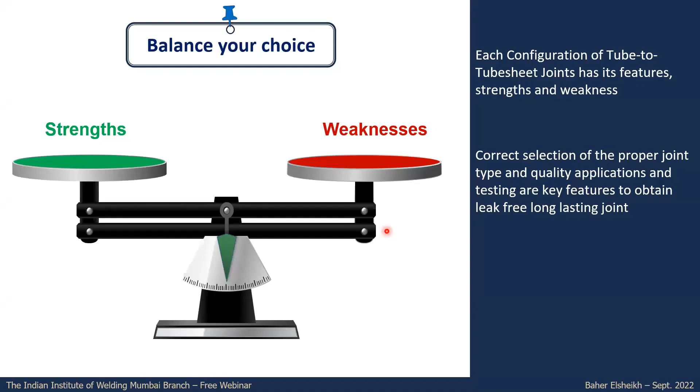Now for the different types of tube-to-tube sheet joints, there is no one selection that suits all applications, either from the application perspective to have the proper design or characteristic of the joint, or even from the cost perspective. That's why you need to think about the proper joint for each case. Each type of joint has its own strength and weakness, so you need to balance the features and select or apply the proper one for your application.

Now for the expanded only joint, it is the most economical one. There is no welding associated with this, and it is easier to retube in the future. So if you are looking at future maintenance or repair, it is much easier to remove the expansion and remove the tube and reinsert again, rather than removing a weld and re-welding. For future plugging with the expanded only, you can easily use a taper plug, which is very simple to apply. And there is no tube sheet beveling required, meaning machining of the tube sheet face is not required, so it's also much less work activity.

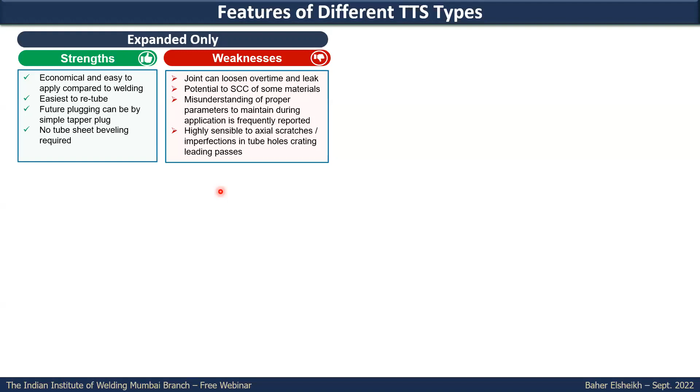But as weaknesses, it can be loosened over time, especially under cyclic load, temperature, or high differential pressure between the two sides. And in some cases, it is potential for stress corrosion cracking if you have that much high residual stress in the application. That's why for some materials, as we'll see later, you have to limit the extent to which it will be expanded. It's not something strange that there's frequent reporting that the proper parameters need to be maintained during application of the expansion, which is somehow misunderstood, leading in some cases to frequent leaking or issues in the heat exchanger. So it looks simple, but it has its own experience and technical requirements, and it's highly sensitive to axial scratches, because once you expand the tube with the tube sheet, it will take the shape of the tube sheet hole, including imperfections and scratches.

Expanded and seal welded is much better compared to expanded only. You will have more leak resistance and better sealing. So it is somehow much preferred compared to expansion whenever you have a slightly higher critical service, where there is no tolerance accepted to have a mix between the two sides.

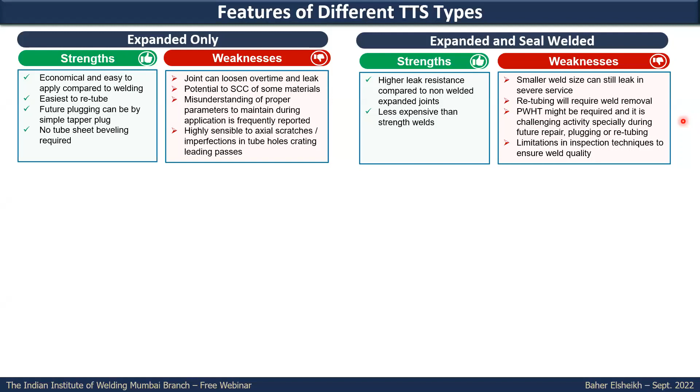The weaknesses for this one: the small weld size is still somehow vulnerable to leaking in case there is some issue in the joint. Retubing in the future will require weld removal, so more work is required. And in case post-weld heat treatment is required, especially for certain services, this will be of some interest during initial construction, and the main concern will be during plugging or retubing. To do post-weld heat treatment at site is not an easy application to have uniform application of. And also there's a limitation of the inspection technique for the weld, which is a common limitation for all weld joints.

Strength welded but not expanded - you can apply only strength welding without expansion. The weld size is calculated to be strong enough, as we will see in the requirement of ASME, and there is no expansion groove needed for this type of joint. So somehow less machining and less work is required, and there's no expansion step needed, so this step is eliminated. But it is potential for crevice corrosion, because the backside of the weld will have a gap where fluid from the shell side can accumulate and cause crevice corrosion. And also there's the limitation on inspection technique, which applies to all welding joint types.

Retubing in the future will be something required - removing the weld, conditioning again the bevel of the tube sheet, and re-welding again. And if post-weld heat treatment is required, it's also not an easy application, especially during repair in future or retubing. Future plugging cannot be only a taper plug.

You have to either install mechanical plugs or welded plugs. Under cyclic load, in case you don't have the expansion, this strength weld will be subjected to fatigue cracking, and it might crack.

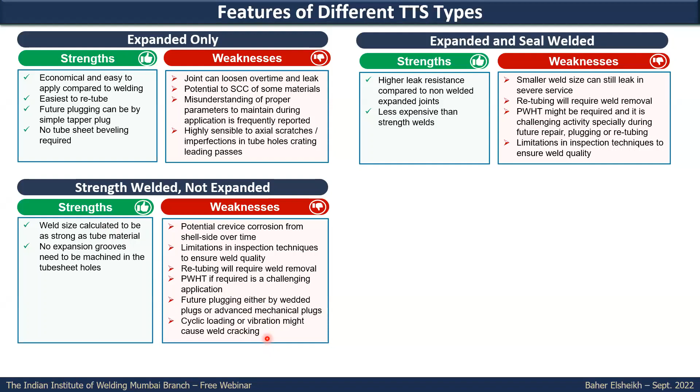The last configuration may be strength weld plus expanded, and this is the most leak resistant one. You will have the strength weld, and also the expansion, which will close the gap. You will eliminate to a very good extent the susceptibility to crevice corrosion, and the weakness part is it's a little bit more intensive work, so from a cost-wise perspective it is higher cost, and there is limitation on inspection, as we said earlier.

Again, all the requirements for the welding here, for future plugging, post-heat treatment if required, where you need to remove the weld or apply weld again, or the application of post-heat treatment at site, which is a very challenging exercise. In high temperature service, usually, or aggressive fluids, usually you cannot rely only on expansion. You need to have welding, whether you apply strength weld plus seal plus light expansion, or expanded plus seal weld.

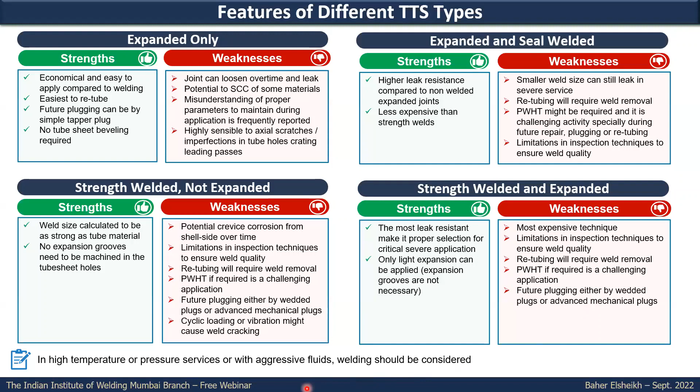Now for the requirement of the tube-to-tube sheet joint, the percent of expansion recommended depends on the material being used. Some materials are subjected to work hardening, or some other material might develop residual stresses in future, which might cause stress corrosion cracking in service. That's why the percent of application of the wall reduction, how much it will be expanded, depends on the material.

We will see that ductile material like carbon steel or low alloy steel can have up to 8% applied. Between the two common standards in the industry, TEMA, Tubular Exchanger Manufacturer Association, or API 660, the standard for shell and tube heat exchangers, there is some minor variation in the recommendation, but almost the same approach or trend in the recommended percent of expansion.

What we can see here is that for duplex stainless steel and for austenitic stainless steel, you have a little bit less recommended target wall reduction or expansion, while for copper alloys and also for carbon steel or low alloy steel, you can apply a higher degree of expansion without any issue.

For the duplex stainless steel, we can see in API 938C, for the use of duplex stainless steel, they are recommending light expansion up to 2% only, plus strength weld, meaning you cannot apply only the expansion.

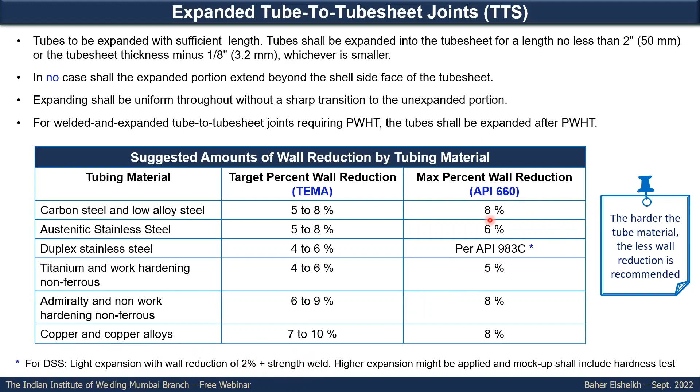Now, one factor that also contributes to how the tube will be affected under expansion is how much gap or clearance there is between the outside diameter of the tube and the tube hole. In TEMA, there is standard fit clearance or special fit clearance, and it is highly recommended to have the special close fit clearance, where there is a minor or small gap between the tube and tube sheet hole, so that you don't have more plastic deformation in the tube while applying the expansion.

Against this, the standard fit with higher clearance is in many cases preferred by the manufacturer because it facilitates the insertion of the tubes during fabrication. But as far as you don't have limitations on the material, you can apply standard fit. The best recommended practice, though, is to apply the special close fit. Especially for austenitic stainless steel, duplex stainless steel, and titanium tubes, you need to apply the special close fit clearance.

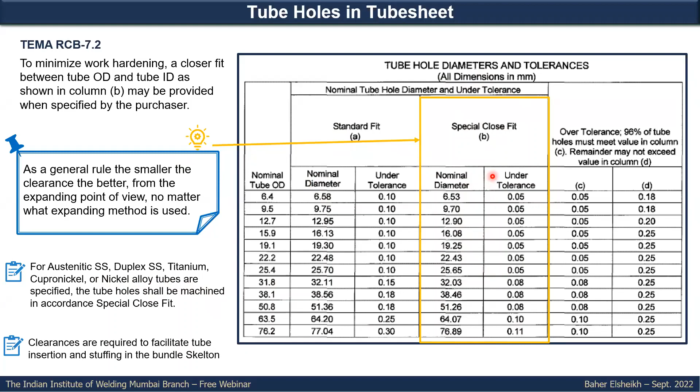For the preparation of the tube sheet hole, it shall be clean, and there is no specific requirement for it to be polished or well machined, because you need a force to grab the tube into the tube sheet hole. But it's very important to avoid any scratches or imperfections in the tubes. As a general rule it should not be there, but we also need to understand that longitudinal imperfection is considered of higher risk compared to radial imperfection.

If this is the shell side and the other one is the tube side, a longitudinal imperfection means you will have a leak path between the two sides. A radial imperfection is still not a leak path, so you can have some tolerance there. But generally, you should not have any imperfections or scratches in the tube sheet hole.

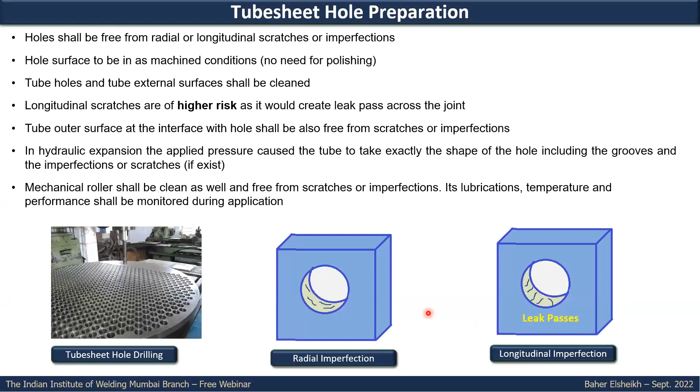When applying the two different techniques normally used in expansion, whether mechanical rolling or hydraulic expansion, as we'll see in the next slide, hydraulic expansion will force the tube to take exactly the shape of the tube sheet hole, including any imperfections or scratches left in the hole. That's why it is very crucial to have it well machined, to avoid such impact on the tubes, which might lead to cracking in future, or to a leak path between the tube side and shell side.

The three different techniques normally used for expansion are roller expansion, hydraulic expansion, and explosive expansion.

Normally, when applying expansion, you should have annular ring grooves. The most common is to have two grooves as per TEMA requirement, but there's an exception: in case of a thin tube sheet with thickness less than 1 inch, you can apply only one groove. For roller expansion versus hydraulic expansion, there's a different recommendation for the width of the groove. In roller expansion it's a fixed value like 3.2 mm, while in hydraulic expansion it's a function of the tube mean radius and the tube thickness.

We will see this exercise in this table. We make a comparison for some different tubes with different thicknesses, showing how much the width of the groove might be required for either mechanical roller or hydraulic expansion.

You will see a major difference for the recommended hydraulic expansion width. By experience of some manufacturers, it is very important to maintain a little bit higher width for the hydraulic expansion to maintain proper sealing. Especially in hydraulic expansion, the tube will take the shape of the groove because you apply pressure. So if the groove width is very small, the tube will be forced to take this shape, and it will have a localized high expansion, which might cause stress concentration at the edge of the groove, and in future it might lead to cracking or stress corrosion cracking on some surfaces.

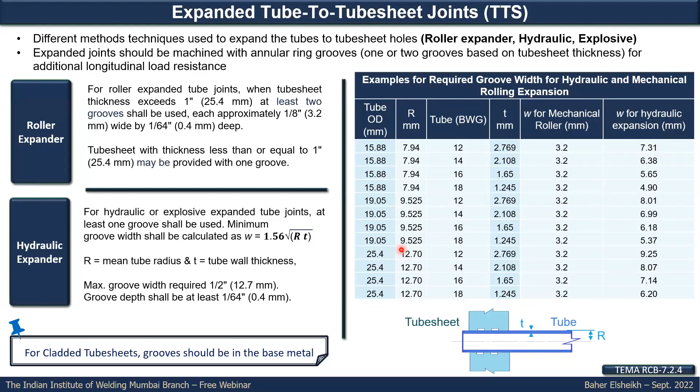This is the application of the mechanical roller. In mechanical rolling, we can see different tools and different types of rollers, with different manufacturers working on that. But you need to understand this field has its own specialty, and in many cases you need to consult the manufacturer of the tool.

There is good recommendation, well known from experiments and experience, for the roller application: how much pressure to apply, whether in one step or stepwise application on the tube sheet, and how many rollers are required, like what we see here for thin tubes, where 3 to 5 rollers should be applied.

You also need to think about the ligaments between the tube holes, which differ between patterns. We have 4 types of tube pattern: triangular, rotated triangular, square, or rotated square. In rotated square and square patterns, you'll find a little more material in the ligament area compared to rotated triangular and triangular, meaning that under the same force, which can cause deformation in the hole itself, the deformation will be more in triangular compared to square or rotated square, assuming the same tube sheet material and thickness.

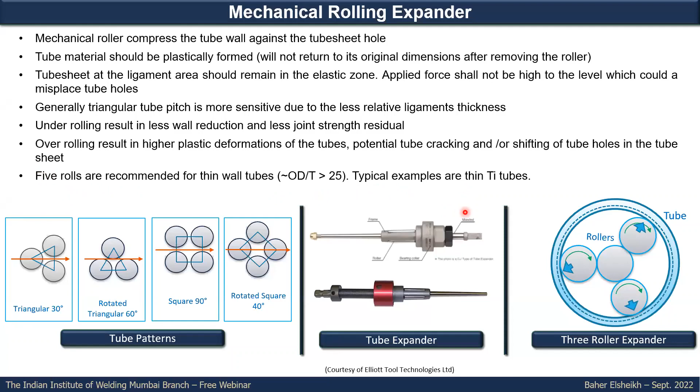This is an example of a roller with three rolls; there are also tools with 2 rolls, and some with 5 rolls, as usually recommended for thin tubes like titanium tubes, where normally thickness is 0.6 up to 0.8 or maximum 0.9 mm. You have to apply 5 rolls in this case, otherwise you will face issues with cracking in the tube.

Hydraulic expansion is applied by applying hydraulic pressure through a tool inserted in the tube sheet hole area, and by applying the pressure you force the tube to seal against the tube sheet hole. This application can be done without a groove in some cases, or with grooves. In hydraulic expansion, the uniform application of pressure will force the tube to take exactly the shape, so if you have a groove, it will take exactly the shape of the groove.

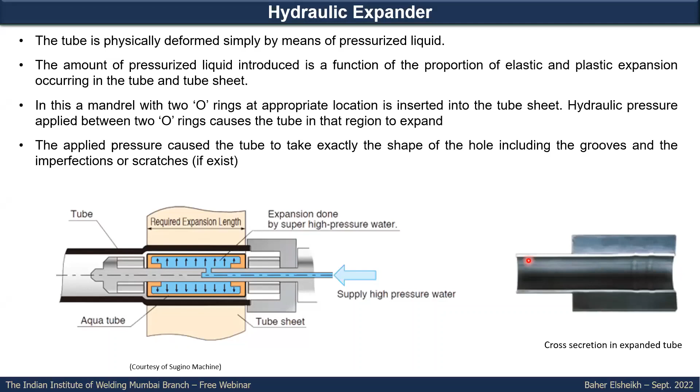This is not usually the case with mechanical rollers, because the mechanical roll will have a little bit longer length, so the groove will come somehow within an area of the roll. The roll has a maximum OD, and it cannot go beyond that. But in hydraulic expansion, it's a pressure that forces the tube to do more plastic deformation in the groove. That's why the width of the groove in hydraulic expansion needs to be well respected, following the recommendations in TEMA and the manufacturer's specs. It has a little bit wider width.

Now we'll move to welding for the tube-to-tube sheet joint. Welding can be either manual or automatic, using orbital welding techniques, usually with gas tungsten arc welding. It is highly recommended to have a minimum of 2 weld passes, and this recommendation is found in many standards, including API 660. So in the selection of the filler wire, you have to respect achieving this during the qualification of the WPS.

One of the challenges while welding the tube-to-tube sheet joint is the relatively high thickness of the tube sheet. This causes a high heat sink and a high reduction in temperature during the weld application. That's why for materials requiring maintained interpass temperature, you might need to apply preheat, and this preheat should be applied uniformly on the tube sheet. Otherwise, you might have issues in the ligaments area in some thin tube sheets.

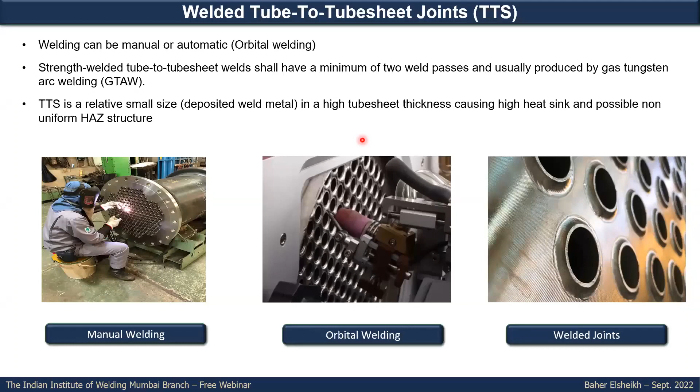This will be a very big challenge if you are working in after-service repair or doing activities on the tube sheet. The control during initial manufacture or fabrication in the workshop can somehow be better monitored. But as we'll see later, you need to think about future work on the heat exchanger during the design.

But other than those recommended in ASME, you are not restricted to only using ASME configurations. There are other configurations, like some with setback, or tube-to-tube sheet welds where it is welded to the back side of the tube to avoid any crevices between the tube and the tube sheet hole.

Another common recommendation, instead of the normal V groove, is to apply a J groove. J groove, or U groove, compared to the normal V groove, gives a better chance of full penetration of the root pass, especially for small joint sizes. There is much limitation in inspecting this weld joint, especially at the root pass. So in some specifications of well-known companies in the industry, they recommend only using the J groove for this reason.

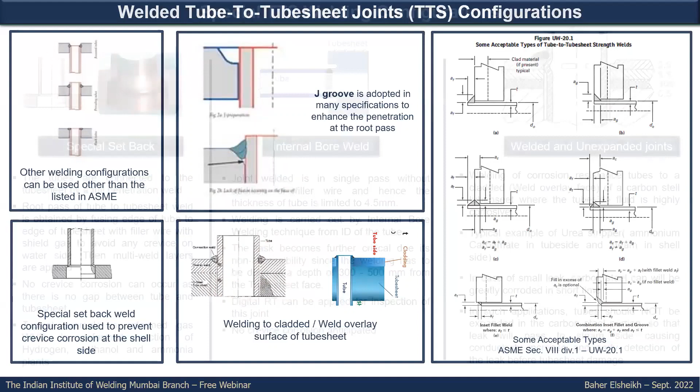In some other applications, you might apply the tube-to-tube sheet joint to a cladded, welded, or weld overlay face of the tube sheet. In some other cases, it is highly advised not to do expansion, only welding, and we will see later why this recommendation is advised. Those are some special TTS welding configurations we can see in the industry.

It's not listed in ASME, but it is used in many applications. This is a special setback weld, normally seen in waste heat boilers in the reforming section of ammonia, methanol, and hydrogen plants, where there is a small lip in the tube sheet from the shell side. The tube also has a lip, like a step, and while welding, it will be fused together. So you totally fuse this part, with no space or clearance for crevice corrosion. This is highly recommended for this service because the temperature here is too high.

And on the shell side, there is boiler feed water. Even with minor contamination of the salts in the boiler feed water, you might have crevice corrosion here, of much higher risk.

This internal bore welding is where the tube is not inserted into the tube sheet, but is butt welded to the back side of the tube sheet. This application is called internal bore weld. This butt weld has many advantages: you will not have the crevice between the tube and tube sheet, and you can also apply proper inspection using digital RT or UT for the weld joints. So you will have very good confidence in the quality of the applied weld.

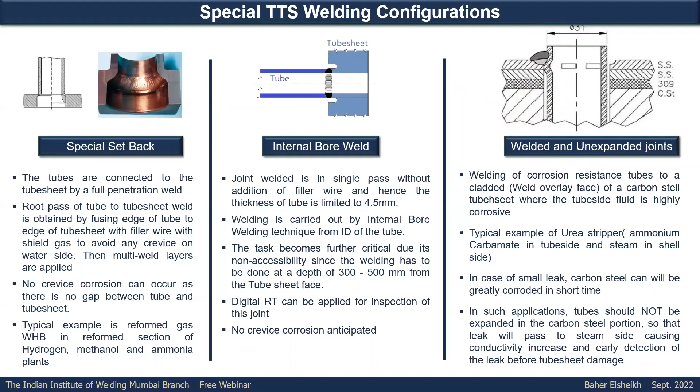Now we will look at how ASME Section 8 Division 1 calculates the required thickness or throat for the different weld joints of the tube to tube sheet. As we said earlier, there are two types of strength weld: full strength weld and partial strength weld, and also, if you can remember, the seal weld.

But for seal weld, there is no calculation required. It is only a supplementary requirement for sealing by the expansion, so no calculation is required. But for the full strength and partial strength weld, there are some equations that need to be applied where you can calculate the minimum dimension of the weld required.

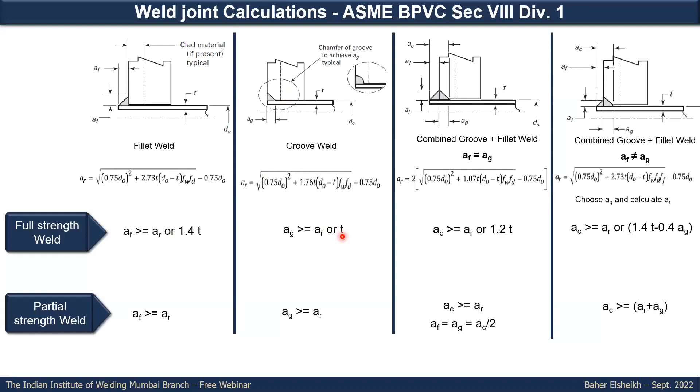If you look here, the recommendation for the full strength weld compared to the partial strength weld is more stringent, as you can see. Here it is whether the greater of AR calculated from the equation or up to 1.4 t, while for the partial strength weld it should only be greater than AR. You will see the same for the different configurations. So as an initial understanding, you will see like the AF, the weld size or weld leg, it should be greater than AR, or 1.4 t, meaning under any condition this AF should not be less than 1.4 times the tube thickness. It might be higher, but it should not be less than this. While in the groove, T is acceptable up to T in case the AR is less than the thickness.

We will have later an example for how to calculate it when we talk about the minimum leak path.

Now for the welded and expanded configuration, there is a very famous question asked many times: when we have both expansion and welding applied, what do we have to do? Expand first then weld, or weld first then expand? There is no single answer that says this is the highly recommended one, but you need to understand the pros and cons of each application so you can select the most proper choice for your case. If you do expansion first then welding, the expansion will close the gap between the tube and the tube sheet hole. So in this case, while applying the weld, you will close the gap where the weld gases should escape.

So you might have higher chance for having weld porosity, especially in the root pass of the weld. Also, the welding after the expansion, the heat from the weld and maybe from the post-weld heat treatment, if required, will do some loosening for the expansion. So whatever expansion you have done earlier will not be the same intact after applying the welding.

Also, one of the features in doing expansion first is that you might do some testing like leak test or hydro test to confirm that your expansion is intact, then you can apply the welding. This is one feature. But if you think of the opposite, welding first then expansion.

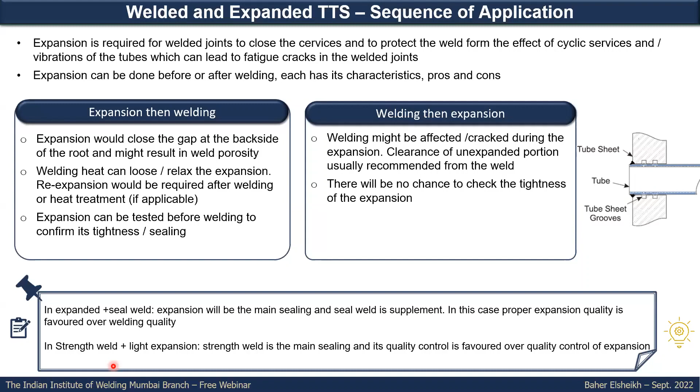For the application of cladding or weld overlay tube sheet, it is required to apply the cladding to the tube sheet in many situations, like having corrosion resistance of the tube sheet face in case you have a corrosive media, instead of having the solid tube sheet from higher material or high corrosion resistance alloy, to reduce the cost or the fabrication requirements. So only weld overlay or cladding surface will be applied here.

In some other cases, also to avoid the dissimilar weld between the tube and the tube sheet. If you have the matching material from the cladding layer or weld overlay layer with the tube, you'll avoid the issue of the dissimilar weld, which can cause some cracking under thermal expansion, or also avoid galvanic corrosion.

In some cases, we are applying the weld overlay so that in future, whenever we need to apply plugging and the plug needs to be welded to the face of the tube sheet, you will not require heat treatment. So if the base metal, for example, is chromium-moly steel, and you applied some grade of austenitic stainless steel or nickel alloy, in future if you need to plug and weld to the tube sheet face, you can do it easily without needing to apply post-weld heat treatment again.

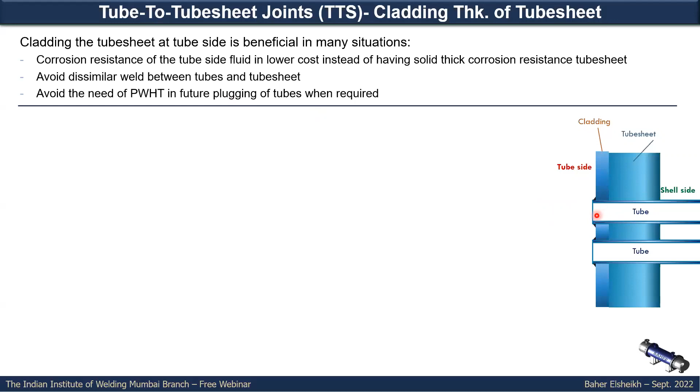We will notice something here for the recommended clad thickness. In case we have to expand only the tube to tube sheet joint, the clad thickness usually should be higher compared to the requirements in case you have welding. Why? Because in case you need to do sealing by expansion, you should have enough distance sealing between the alloy of the tube material and the alloyed part cladded here.

Otherwise, if it is a small expanded part, you'll have a higher chance of the media escaping to the lower grade material, which might be affected by corrosion. But in welding, the sealing will be by the welding to the clad here, so you don't need much higher thickness. You need only thickness to respect the corrosion resistance and the dilution in maybe the first or second passes between the clad material or weld overlay and the tube sheet.

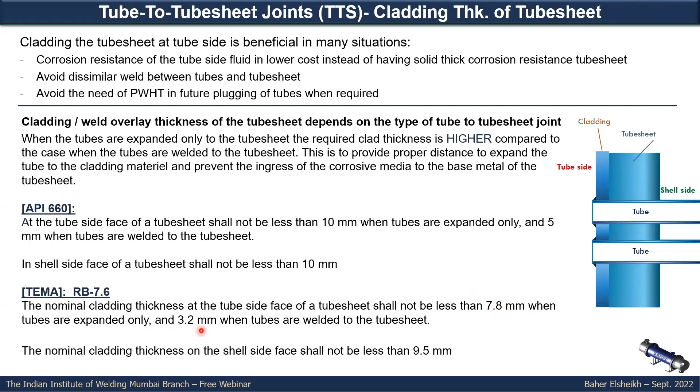That's all. We will see the same approach applied in two standards, API 660 and TEMA standard. In API, they are asking for 10 mm cladding thickness in case you have expanded, and 5 mm in case you have welded. In TEMA, the same approach but different values: they recommend 7.8 mm for expansion and 3.2 mm only in case you have weld.

There are 3 different techniques known in the market for the application of the cladding or the weld overlay: explosion welding, hot roll bond, and weld overlay.

If you have hydrogen service, you have to be very careful about selection of the type of weld overlay or cladding. Hot roll bond has one of the least bonding strengths between the cladding layer and the tube sheet base metal, that's why it is highly not advised or recommended for hydrogen service. In contrast, weld overlay or explosion welding have some acceptable bonding compared to hot roll, which is not recommended for hydrogen service.

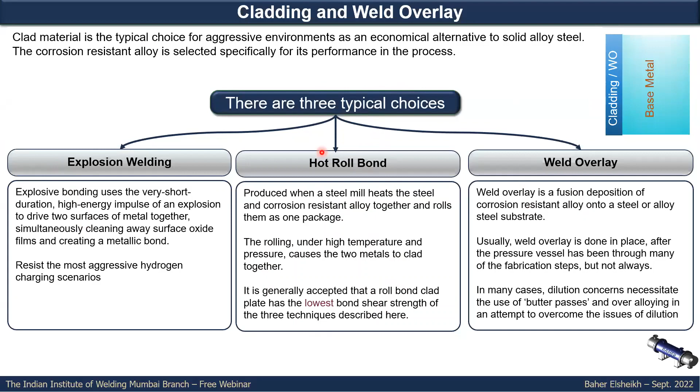One of the main features you have to respect and do properly with high quality is the understanding of the mock-up of the tube to tube sheet, especially for the welding application. We will see in ASME Boiler and Pressure Vessel Code Section 9, QW 193, the recommendation for the application of the mock-up.

Each welding procedure should have a mock-up, and also each welder qualification should have a mock-up. For the welder qualification, you should have a mock-up with minimum 5 tubes, and for the procedure qualification mock-up, you should have a minimum of 10 tubes.

The material should match the material which will be used in production. Whatever testing is required, and we will see this in the next slide by ASME, you need to think about it carefully. If you have special requirements for the service, you need to respect them, like the hardness requirements for sour service applications.

One thing you need to think about while selecting the material for the mock-up for the tube sheet: in many cases they are using tube sheet from similar material, not exactly the material used in the application or production. This might lead to misleading results, especially if you have improper properties or quality in the heat affected zone on the tube sheet side.

If in the mock-up the tube sheet side weld heat affected zone has some higher hardness or issues in the microstructure or grain size, and you are not using the same material as in production, you cannot rely on the results. You will not be able to reject it properly, and from the other side, it will mask you from the results — it will not give you representative results.

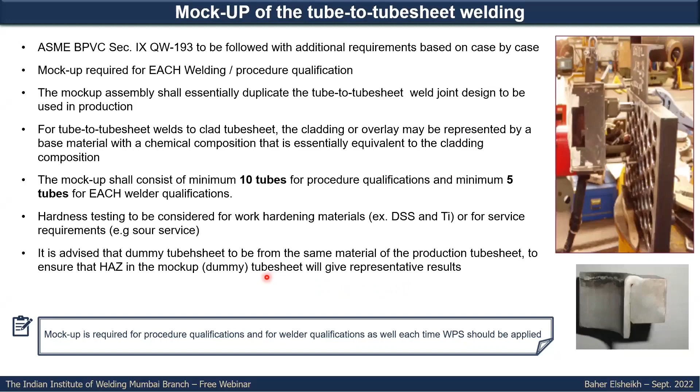For the mock-up procedure, here are some recommendations. First, you need to be careful that before applying the mock-up, you should have a detailed procedure for what should be applied. Here we are providing a suggested, recommended step-by-step procedure for the application of the mock-up.

First, you have to check the condition of the tube sheet hole and the tube surface. Measure and record the actual hole diameters, tube inner diameter, and tube thickness of all tubes and holes, and this has to be well recorded and marked. Then follow the sequence of expansion and welding as agreed in production — you might do expansion first then welding, or whatever is agreed, you have to apply.

Then do the visual examination. You have to see complete fusion, free of visual cracks, porosity indications, with no evidence of tube burn through. Then apply liquid penetrant testing, and it is highly advised to apply it for the root pass and again for the final pass.

You need to measure and record the actual tube ID after the expansion to calculate how much reduction occurred — this is for sure for the expansion cases. And then do the macro examination.

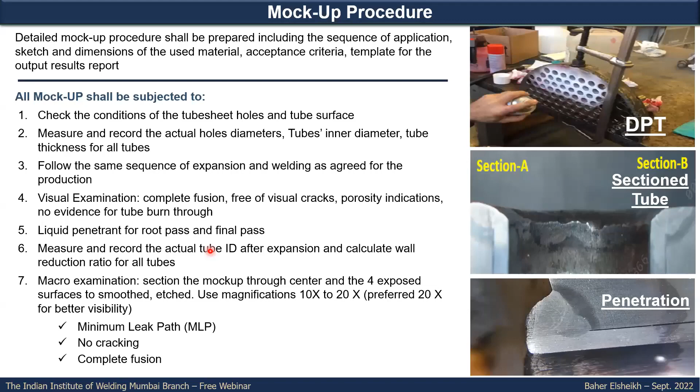While doing the macro examination, ASME recommends magnification of 10x to 20x, but actually it is highly preferred to be 20x or maybe even 25x to have a good representation of any lack of fusion, porosity, or lack of penetration. The quality of the weld joint is highly crucial for the long lasting lifetime of the heat exchanger. You need to calculate the minimum leak path and make sure there is no evidence of cracking and that there is complete fusion.

This is the method for how to measure the internal tube bore, and this equation from TEMA shows how to calculate the measured or expansion ratio. This is an example of some of the calculation.

We measured everything: tube sheet hole, tube OD, tube ID after expansion, and tube thickness. These measures should be the actual tube and hole dimensions measured during the mock-up, not something from the drawings or from the recorded value. Because as you can see here, 0.2 something from mm will have an impact on the calculated expansion ratio.

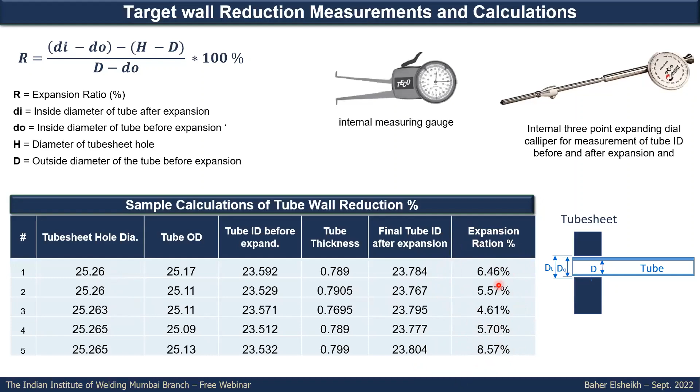Then you need to calculate the expansion ratio and compare it with the recommended value, how it should be.

Now for the minimum leak path. Minimum leak path is the minimum path where the media can leak, and it can be defined as the minimum distance in any direction from the root of the TTS weld to the nearest surface. As you can see here in this photo, it is the radius of the largest circle which can be totally inscribed inside the weld, and whose center is the weld root.

So in the drawing you might have some circles, and it should be the greatest one which is fully enclosed. The radius of this one will be the minimum leak path. Minimum leak path depends on the configuration of the joint, whether it is fillet, grooved, or fillet plus groove, and also the actual shape of the application during the mock-up, some concavity, convexity, the actual geometry used.

If you see here the recommendation between API 660 and ASME section 9: in API 660, they mention the minimum leak path shall be a minimum of 2/3 of the nominal tube thickness. In ASME section 9, they say it should meet the required design, but there is no specific requirement on how to calculate or measure it. We will see in the next slide how to think about that.

First, look at the different configurations here and think about what might be the minimum leak path. From the design perspective, for this type of joint, the fillet one, the throat will be the minimum leak path. For the groove, this will be the minimum leak path. But for the combined groove and fillet weld, you need to combine both - the minimum leak path here will be this dimension plus the throat dimension, or similar.

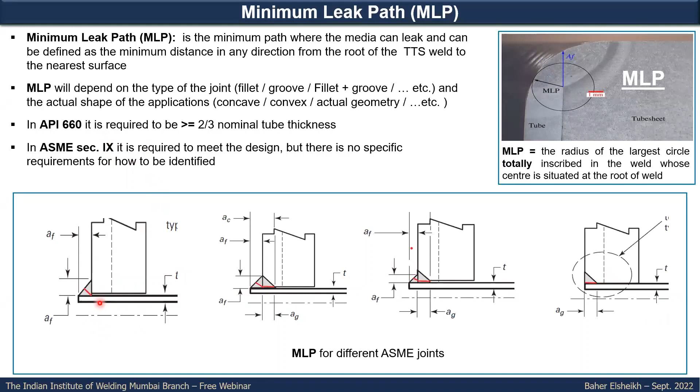We will assume an example just for illustration: a tube of carbon steel, SA-179, welded to a tube sheet SA-266 grade 2, all carbon steel. Tube diameter is 3/4 inch, BWG 14, which is 2.108 mm. Design temperature is 200 degrees Celsius. We assume this to build two examples, one for fillet weld and one for groove weld.

The same equation, if you can remember from UW-20, here we will use for calculating how much AR is required. From the AR we calculated, we get the allowable stress from Section 2 Part D for the tube and for the tube sheet, and then get FWFD, which will be used in this equation.

The minimum leak path here from the design perspective will be the throat. If we calculate the throat, it will be AF over square root of 2, so it will be 2.07. From this calculation, if we respect the design code, this is the minimum leak path for the design configuration - so in this case, MLP is 2.07 mm.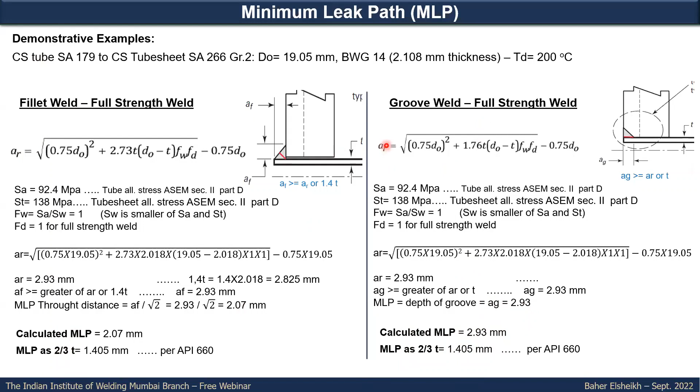While calculating as per API 660, it's 1.405, so here also it is much more conservative compared to API, and also compared to the requirement for the fillet weld. This is one approach to think about the minimum leak path, which should be checked in the mock-up.

Now this section will talk about the common defects which you can see in the tube to tube sheet joint. This figure shows how the most common defects appear in the tube as a whole part in the tube sheet, and we will focus here mainly on the area of the tube to tube sheet joint, where we can see galvanic corrosion, inlet erosion. It might be in the first part of the tube, and also in the face of the tube to tube sheet joint. We might have stress corrosion cracking, and crevice corrosion from the shell side might also affect the joint.

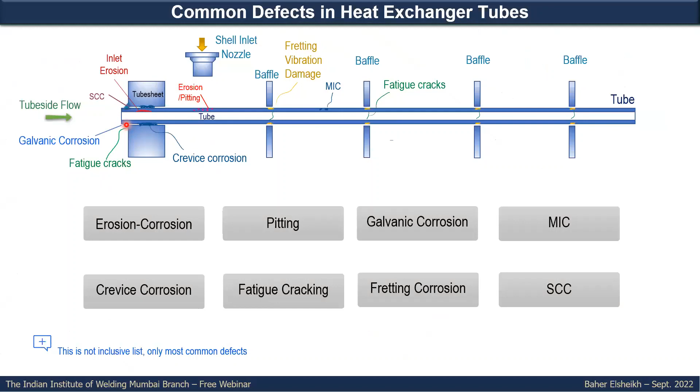As a general thinking, corrosion might happen by the combination of environment, material, and stress. Environment, stress, and material together, if the conditions can be applied for stress corrosion cracking, you have the three required factors. Environment with stress only, you might have corrosion fatigue. Material with susceptible environment, you might have corrosion, and material with stress, you might have fatigue.

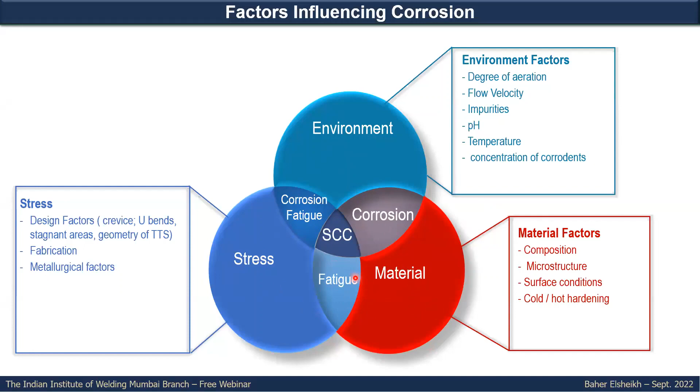The most common issue for the tube to tube sheet joint, first we will start with crevice corrosion. Here is an example of crevice corrosion from the back side of the tube, where you can see the full tube thickness has gone, and you can see the leak directly there.

For crevice corrosion, as per this curve from the NALCO guide to cooling water systems, there is some incubation period for the crevice corrosion, and after some time, which usually in many cases might be around 1 year more or less, you will have some exponential acceleration rate for the corrosion attack.

To close the crevice or eliminate this crevice corrosion, you need to think about proper expansion of the tube to tube sheet so that you can close the crevice, or you might think about using setback weld to expansion or setback weld, or you might think about the internal bore if applicable.

And you might select a more resistant material, so the condition is there but the material has higher resistance, or you maintain the condition of the fluid itself to somehow reduce the tendency to cause corrosion. In some heat exchanger designs, you might have vapor bleeding to avoid stagnation of the trapped vapors.

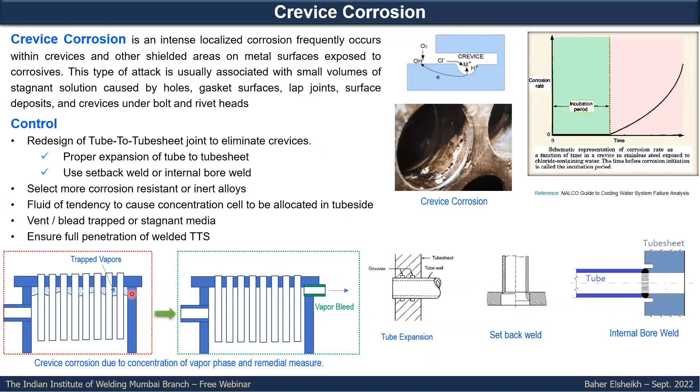For pitting attack also, you can see it in the tube-to-tube sheet joint here, and you can think about having resistant material with higher pitting resistance equivalent number, or avoid stagnation. It is highly recommended to have the tubes flush with the tube sheet, especially for vertical heat exchangers, to avoid deposition or accumulation which might cause pitting and corrosion in the top face, including the tube-to-tube sheet joint.

You need to maintain the protective film of the material. In many cases and some services, you might intentionally add some oxidizing material to maintain passivity, like in some boiler feed systems, or in some carbamate applications in urea plants. Also avoid condensate corrosion by maintaining temperature higher than the dew point, like in the case of CO2 services.

Erosion corrosion: this photo shows high erosion to the face of the tube sheet, including the tube to tube sheet joint and the inlet or first part of the tube itself. Over time this might cause metal loss leading to a leak here.

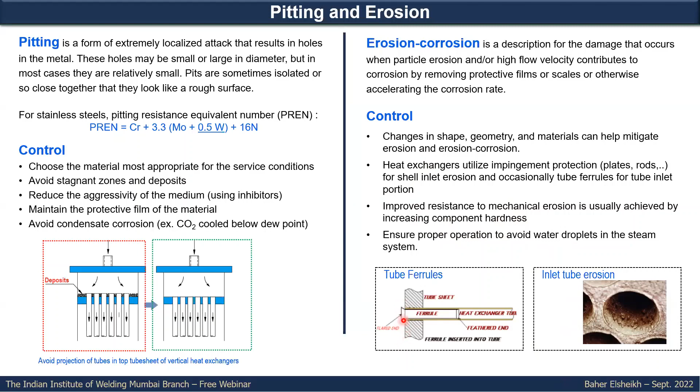So you might think about changing the configuration or geometry to avoid such high impact erosion, or utilizing impingement protection in the channel itself, some perforation or similar, to protect the tube from direct impingement, or improve the resistance of the material by using higher hardness material. In some designs you can have ferrules to protect the first part of the tube, including the flared end, which will protect the joint as well.

For the stress corrosion cracking, as we said, the material, environment, and the stresses all should be there to have stress corrosion cracking. It is one of the most common issues in this tube-to-tube sheet joint to have such kind of cracking. So this is somehow, in many cases, linked with the crevice corrosion. In case you have a crevice here, you might have the attack on the weld by stress corrosion cracking.

To avoid that and control it, you might need to use higher resistant material. You need to avoid the residual stresses, and by avoiding the residual stresses, you need to think about the way you apply the weld, and also the ratio of expansion you have applied, and to have a clearance between the expanded part of the tube and the weld. Don't apply the expansion up to the weld or with minor clearance to the weld, or you'll have higher residual stresses or a stress concentration in this area. Apply the proper expansion. Full weld penetration is highly crucial in avoiding that; otherwise, the root pass will be an initiation point, and it might be considered a crack initiation in many cases of stress corrosion cracking.

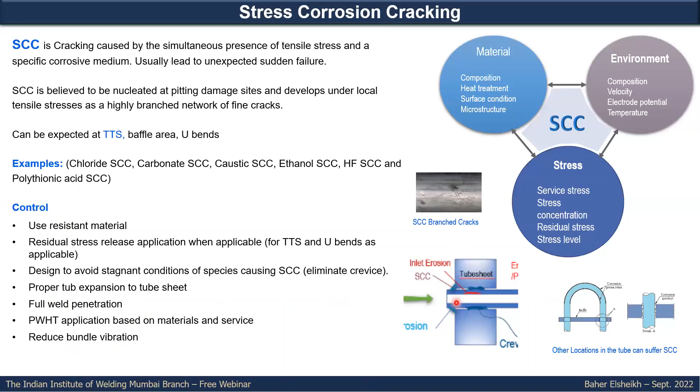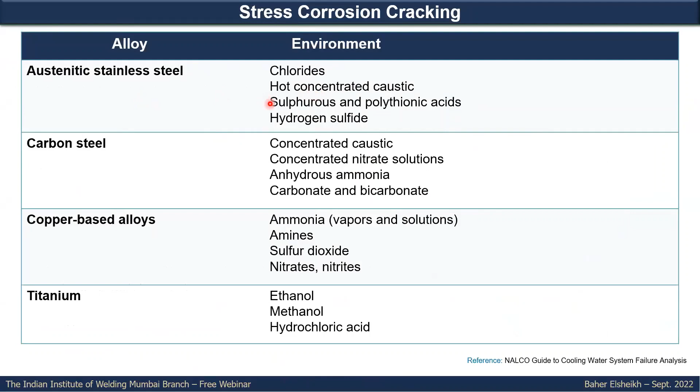Also from the service perspective or the design of the heat exchanger itself, you need to reduce bundle vibration or cyclic services. Otherwise, when the tube is vibrating like that, all of these stresses from the vibration will be converted directly to the weld joint, leading to cracking or stress corrosion cracking. Those are one of the tables for the most common services causing stress corrosion cracking in some materials. After the session, we will share this material in PDF format with all attendees, and this table references the NALCO guide to cooling water systems.

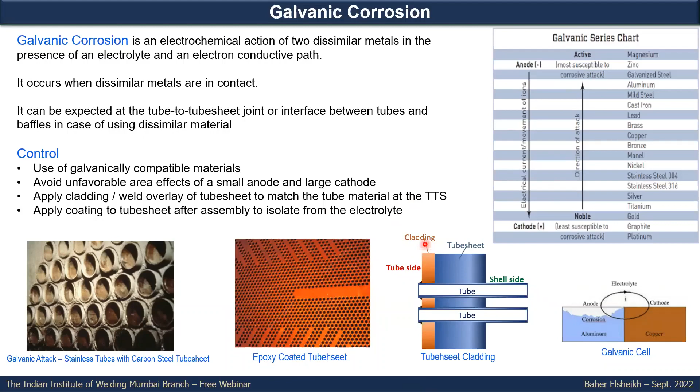For galvanic corrosion, you can see here the preferential attack of the tube-to-tube sheet joint in some galvanic corrosion cases, and it is not something uncommon. You can see this in the industry, and somehow you need to think about, as we mentioned earlier, applying cladding to avoid dissimilar metals, so you will not have the differential in potential which causes galvanic corrosion. In some cases you might apply special coatings like epoxy coating to the face of the tube sheet, and also including the tubes. In many applications it is applied, and this will have some good effect on eliminating or mitigating the galvanic corrosion.

Here is a summary of the most common weld issues we can see in the tube-to-tube sheet joint. Porosity, which might be caused by insufficient shielding or purging gas, or unclean base material or filler. You have to use sufficient flow of shielding or purging gas, or proper cleaning before the application of the weld itself, including the base metal and the filler wire.

Lack of fusion, caused by improper welding parameters, low current, high speed. This is one of the famous issues in the tube-to-tube sheet joint, both the lack of fusion and the incomplete penetration. Incomplete penetration can be addressed either by controlling the weld parameters, or from the design perspective, having a proper groove size or shape so you have a better chance of achieving good penetration. Also, selecting a smaller filler wire size can help achieve proper penetration during the application of the root pass.

Burn through can be seen in thin tubes in some applications, and you need to control the heat input to avoid that. Undercut is caused by high current or a long arc length; use the proper welding technique and parameters. That's why, during the mock-up for qualification of the WPS, you fix all these parameters.

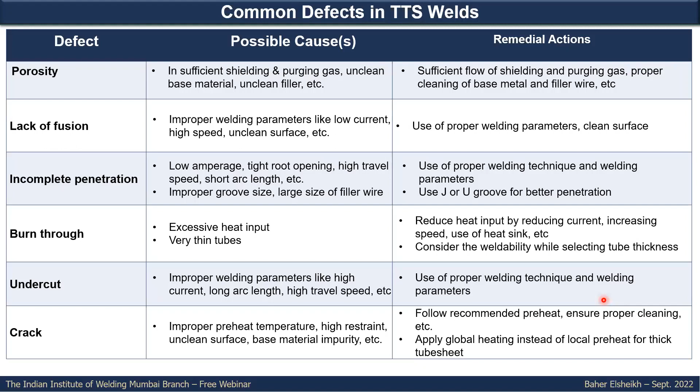You might also have cracking in the tube-to-tube sheet joint from high restraint or an unclean surface. Here you need to think about, as we said earlier, the high heat sink you see from the thick tube sheet, and you need proper control of heat input and heat dissipation during the application of the weld.

Those are the most common inspection techniques we use for the tube-to-tube sheet joint, whether after or during fabrication, in-service inspection, or during repair activity: visual examination, surface examination by PT, volumetric examination by UT. This technique is limited to some configurations and is not commonly used. In-situ replica can be applied, but it's also challenging because the weld itself might not have enough landing space or area to apply the replica.

The helium leak test, hydrostatic leak test, and for erosion or during service or expansion, you might check how much the actual tube ID has changed using calipers like what you see here. Radiographic examination, RT, is somehow a recent technique; it's not something common in the industry. We still see some manufacturers talking about it, but it's still not commonly used in the industry.

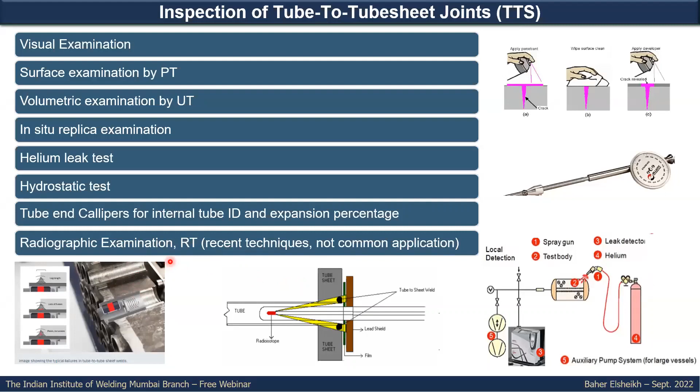Now, this section will talk about the leak repair.

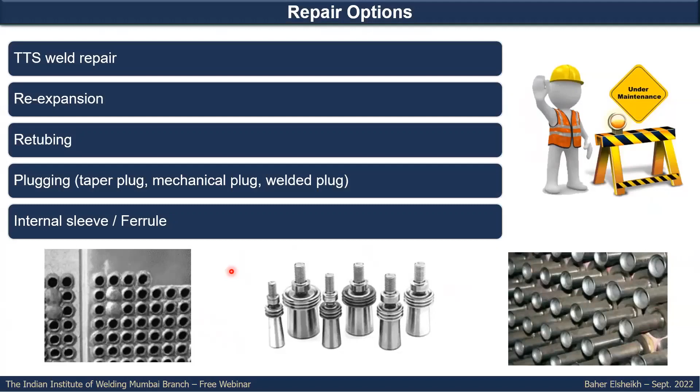Whenever you have a leak, you might think about whether to do weld repair, re-expanding again, or retubing, or plugging. And in plugging, you might have taper plug, mechanical plug, or welded plug, or applying internal sleeve or ferrule to protect the tube.

Here is a recommended or suggested procedure for the weld repair. First, you need to grind out the affected part, and this shall be done very carefully, especially in case you have some crack or something, because during the grind out, the crack might propagate. This is a risky application, so it's preferred to have a pencil grinder with careful application, although it is time consuming.

Then apply stepwise DPT to confirm that the full defect is already removed. Then apply the welding first pass, do DPT for this pass. You might apply a pre-leak test after the first pass to confirm its intactness and integrity. Then apply the second and filling passes, and DPT again.

If post-welding treatment is needed, you need to apply it, and it is something challenging. Application of the post-welding treatment inside for the tube sheet is not an easy application to confirm the uniform and proper heat distribution. It shall be carefully applied, and in some cases you might need to do finite element analysis to confirm that thermal and mechanical stresses during the application are within accepted values which will not harm the equipment.

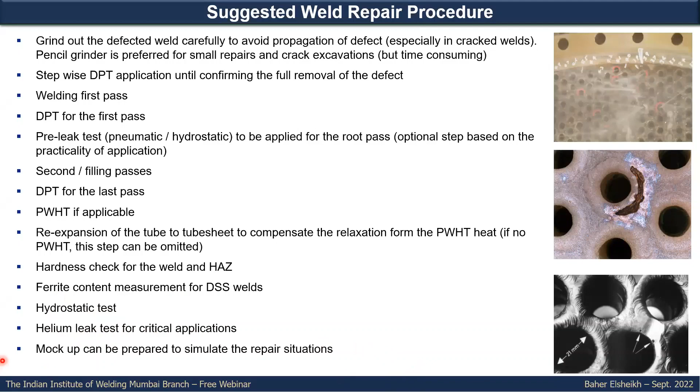If you apply this, you need to do the expanding again, the hardness test, ferrite content if applicable, and the final hydro test and helium leak test if critical service requires helium leak test. During the preparation you might do a mock-up, especially for critical equipment, before trying to do any repair.

For the plugging, we said we have many types of plugs. This is the most common one, the simplest one, the tapered plug. Tapered plug, as we can see from ASME PCC2, is somehow limited to a little bit lower pressure and temperature, and also in case the tube-to-tube sheet joint is not welded.

Here we are talking about plugging tubes with thickness loss but not leaking. If it's leaking, no issue. But if it's not leaking, you need to apply some piercing of the tube, because if you apply a plug like that, media will be trapped in the tube, and during service and heating it will create vapor pressure. Increasing the pressure might cause the plug to fly out and cause an incident. So it's highly recommended to pierce the tube as per PCC2. Two holes need to be applied before applying the plug.

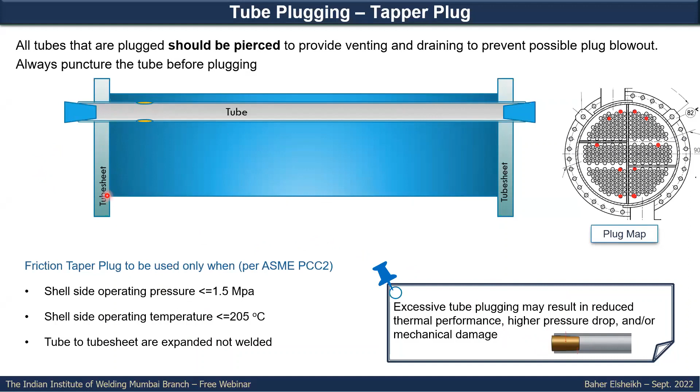Plugging means you are restricting the flow, so you might impact the pressure drop and thermal performance of the equipment itself. And later, when we see the mechanical plug, even the integrity by applying the welded plug might be impacted. This mechanical plug is somehow recommended or can be used for higher pressure applications.

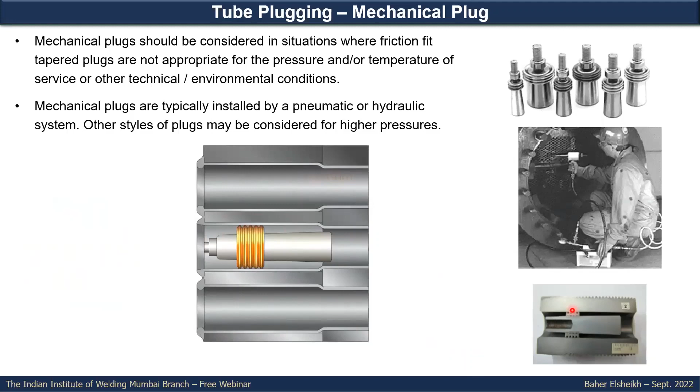If you can see here from this illustrative graphic how it is applied, it is inserted, then by hydraulic machine the inner part is somehow pulled like that. While pulling, this is covered, it is like a labyrinth. This labyrinth will be sealed against the tube and force the tube also to seal against the tube sheet.

Welding, you need to think about the application of the welding here. Mock-up is highly advised to be prepared before the application, especially for the qualification of the welders. In some cases, just starting to attend some leaking part by welding, you might create issues for the other adjacent tube, so this application shall be done with high care.

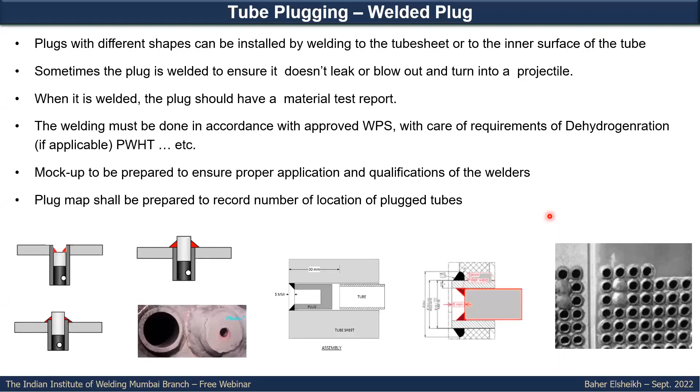Now this is our last part. We will see some case history showing some good cases like this one, with internal bore weld. If you can see in this photo, it was leaking from the weld itself.

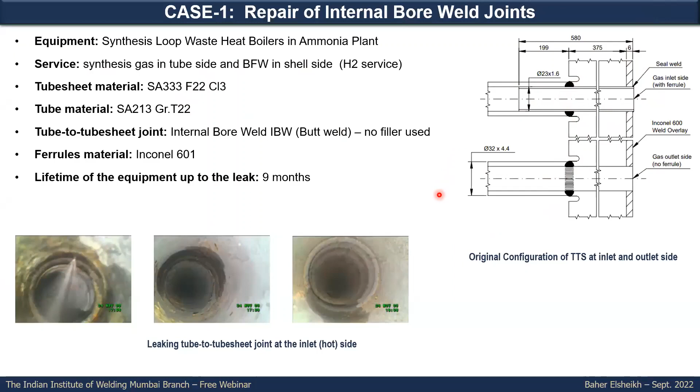The service is in hydrogen service, and there is a weld overlay here, but welding between the tube and the tube sheet, as you can see in this configuration. This one was repaired at site, where they installed some ferrule inside the tube and welded to the tube inner surface from here and the tube sheet surface from the outer side. They have made many mock-ups until they had good confidence in the applied technique.

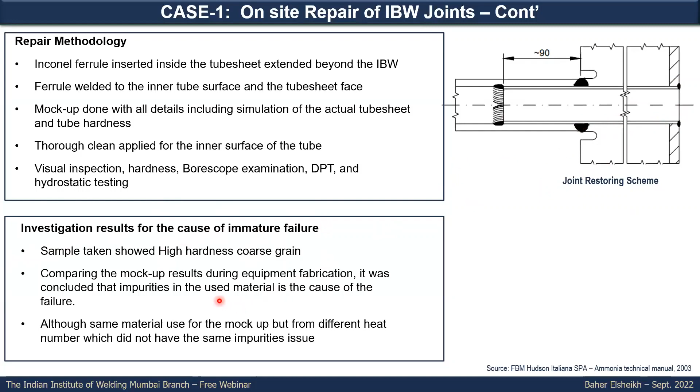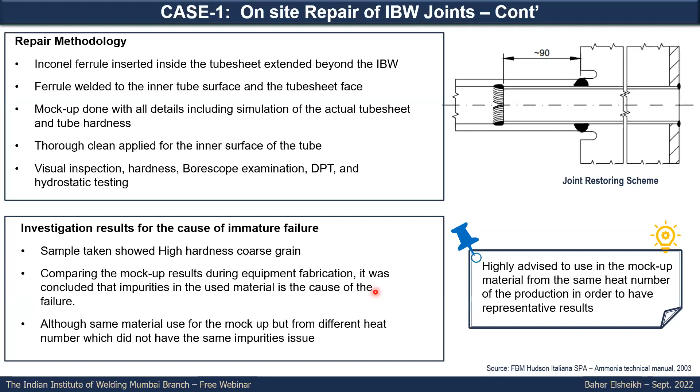During the investigation, they took a sample from the failed tube, and the conclusion was that it was actually in service for a short time, and they found it is related to improper application of the initial mock-up during the equipment fabrication. They used the tube sheet material, a similar material, but not from the same heat number. When they used the sample from the actual failed tube sheet, they found coarse grain, high hardness, and some impurity material in the tube sheet. So somehow during the mockup, if they use the same part or part from the production material itself, you will have representative results and avoid such issues.

This is the second case. This second case was a waste heat boiler in an ammonia plant, and cracks were found in many parts, including the tube-to-tube sheet joints. The tube material is austenitic stainless steel, and the cracks are stress corrosion cracking from the boiler feed water side, from the shell side. It is due to improper expansion of the tube to tube sheet. That's why proper expansion to avoid crevice corrosion is highly crucial to the equipment in many cases, especially whenever you have material susceptible to stress corrosion cracking.

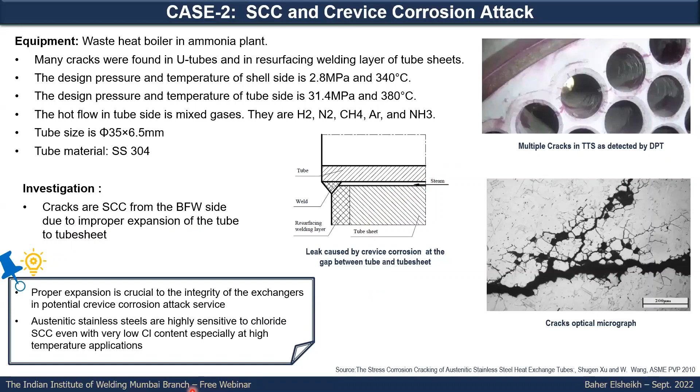This is another interesting case. This is a high pressure carbamate condenser. Some pinhole in one of the TTS, a minor one, causing the carbamate from the tube side to pass to the shell side. And if you can see in this photo after removing this part, there is a very big cavity in the tube sheet, carbon steel tube sheet. And this was in a short time because the carbamate is highly aggressive media.

That's why, as we said, there is no one solution fits all. In the previous case history, we said crevice corrosion shall be closed by proper expansion; it is highly crucial, you have to follow this. But in this case, it is highly recommended not to do expansion and to leave a clearance or gap between the tube and the tube sheet hole, so that in case of some leaks like that, it will pass easily to the shell side. Once passed to the shell side, there is online monitoring for the parameters of the water, so the conductivity will increase sharply and ammonia will be detected, giving you good time to attend to the equipment before having such massive impact.

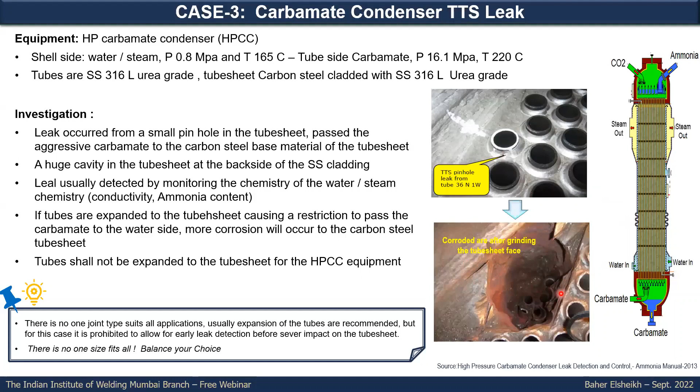So as we said in our initial slide, balance your choice for the selection of material. This is another case history for a heat exchanger, in service for a very short time, only 30 days. After 30 days in service, cracks initiated exactly beside the root of the tube-to-tube sheet joint. It is carbon steel, welded and expanded. During the investigation, they found lack of fusion in the weld, and also the expansion extended up to the weld joint, causing stress concentration, which they confirmed by finite element analysis. In such a short time, there is definitely some contribution from cyclic service or vibration in the bundle itself causing this attack.

That's why weld quality is very crucial. Inspection techniques are somehow limited, especially for the weld pass, so mock-up is very important to ensure the quality of the joint. Also, you should have enough clearance between the tube and the tube sheet, enough clearance between the expanded part and the weld of the tube to tube sheet, so that you will not affect the weld by cracking or having high residual stresses or stress concentration in this area. Also, based on the service, you have to mitigate the vibration, and this is mainly part of the thermal and performance design.

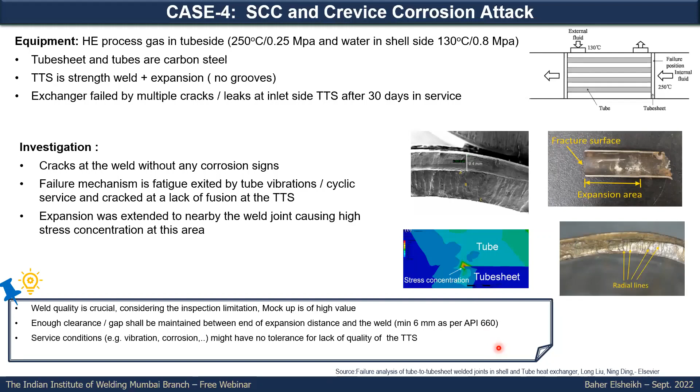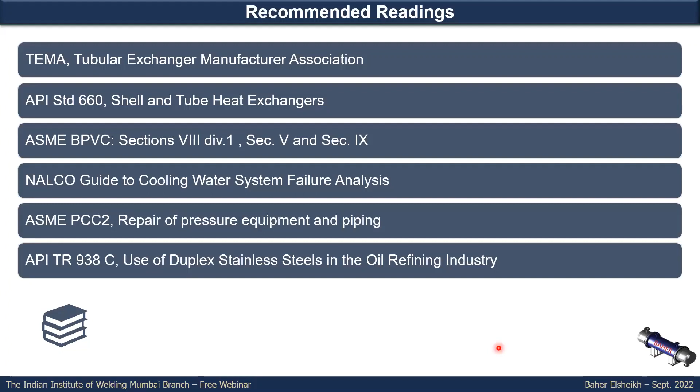By that, we have come to our suggested reading: maybe TEMA, API 660, ASME Boiler and Pressure Vessel Code, NALCO guide for cooling water system, ASME PCC2, and API technical report 938 for the duplex stainless steel. Now we came to the end of our presentation, and Dr. Krishnan, please, you might go for

the discussion. Hello? Dr. Krishnan? Hello? Yeah. Hello, Dr. Krishnan? Dr. Krishnan? Hello. Yeah. Let me check.